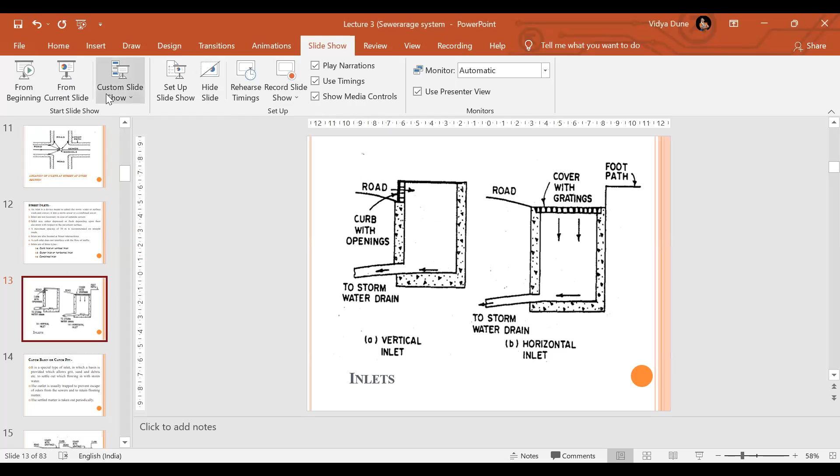So I will open this. If it is finished, then we'll go to the next. Once you finish, let me know. We'll move to the next point.

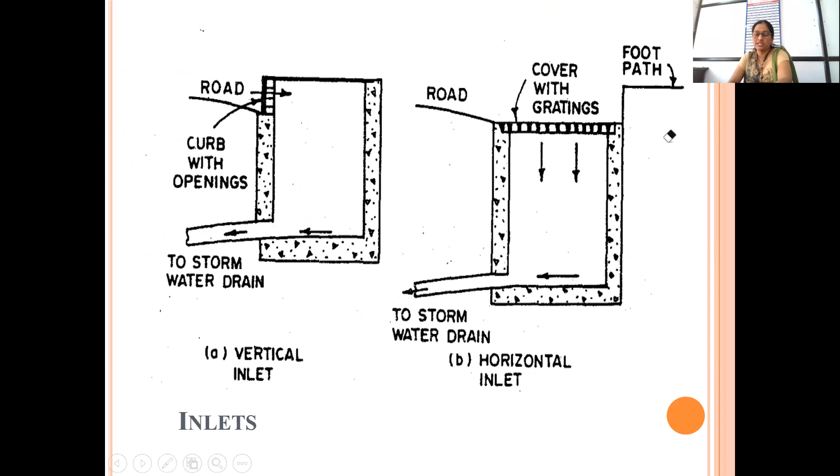So we need to restrict them. Here we have made an arrangement to avoid the entry of larger particles like plastic material by providing the gratings. But for the debris particles there is no arrangement; direct entry is possible in both cases. To avoid that issue, the same system is enhanced, and that enhancement is known as the catch basin. We will see with the figure what this arrangement is.

So here inlets are provided like this. Here is the road, and this is the vertical arrangement for the entry of storm water through the gratings. In the earlier case there was a direct disposal pipe here, but instead of that, here we have provided the hood, and because of this hood arrangement, the collected water is not moving outside this chamber directly.

It comes into this chamber, and naturally grit, sand, and debris particles are heavier, so they immediately settle down at the bottom, and hence the clean water will move through this pipeline. The outlet pipe arrangement is changed to avoid the entry of sand, grit or debris into the sewer line and to avoid the drawbacks of the sewerage system. This is the hood arrangement.

Another arrangement you can see here. Entry of water may be here or somewhere; you can have inlets through the vertical or horizontal inlet, no issue. But the outlet arrangement needs to be changed. In another figure, the water enters here, the particles settle here. Until the water rises up to this level, it will not move through this channel. Some more arrangement is done here: a bend is provided to the outlet pipe.

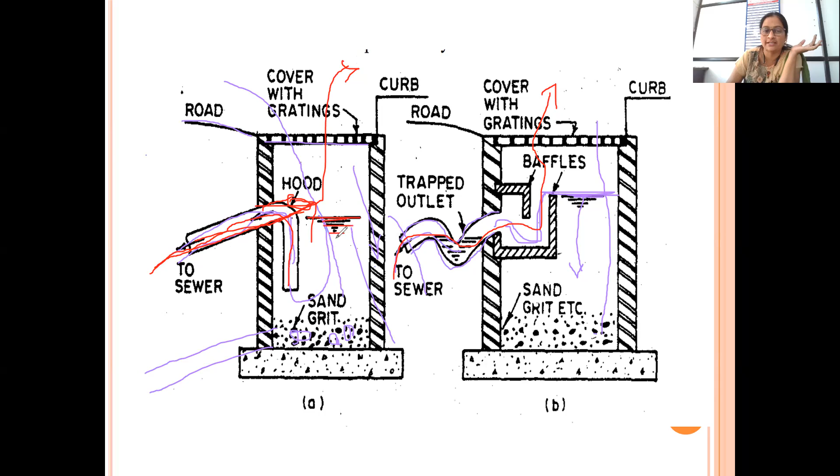But in both of these arrangements, it will not allow the water level to go down below that. So until here it is not possible for gas to enter. It is a water seal, so gas will not enter. It will be restricted. Here also is the arrangement of the bend, where the water will keep on being stored, and hence the gas will not pass through this water. So it will be an obstacle to the entry of foul smell from the sewerage system to the society.

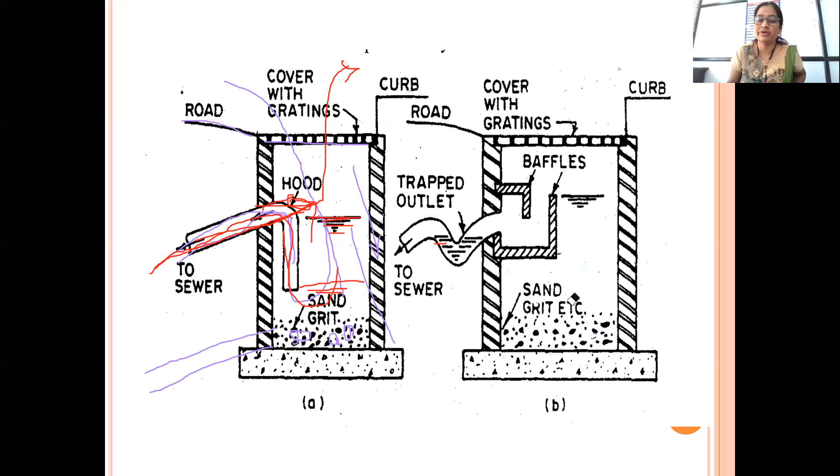So this way, two purposes can be solved. That problem will occur in the earlier type of provision, so that's why these kinds of modifications are done. Nowadays, instead of simple openings, these kinds of openings are provided, which can be renamed as a catch pit or catch basin, to avoid the entry of grit into the sewer line and to avoid the entry of foul smell from the sewer line to the society. So both functions will be performed well in these kinds of arrangements.

Is it fine? Understood? Ma'am, Rajanandini is asking: when sand particles settle up to the hood, there is blockage of the outlet. Yes, good question. Here I have read one sentence: the outlet is usually trapped to prevent escape of odors from sewers and to retain floating matter. The settled matter is taken out periodically. So intermittently, we need to go for maintenance of this catch pit.

These gratings are not fixed. They are movable. So you can remove the grit and the sand particles settled at the bottom manually and perform the cleaning of these catch pits, and that problem will get resolved. Very nice question. Actually, you are paying attention and understanding how this function is being performed. That's why this question was raised.

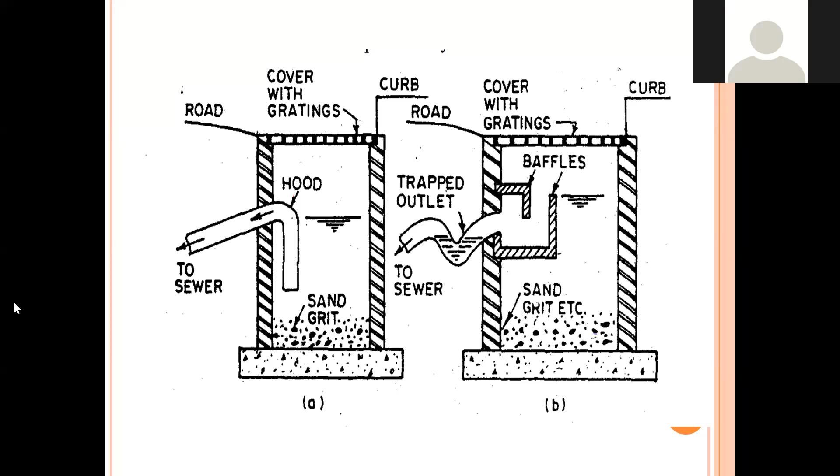Previous slide. This one. Yes, ma'am. Okay.

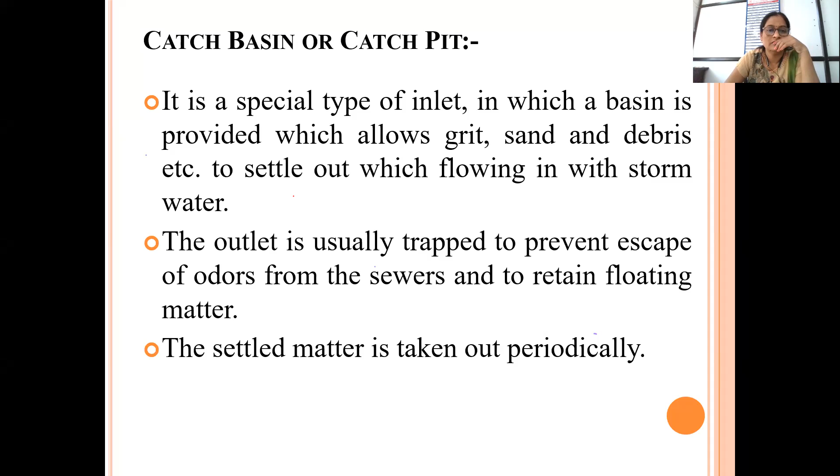Is this diagram finished by you? No, ma'am. Then finish it first. Or do you want to complete this write-up first? Okay, I will dictate later. Go for completion of the diagram first. The dictation part you will get later in the figure notes itself. But you should practice and understand while drawing; you will understand the function also. That's why I'm making you draw.

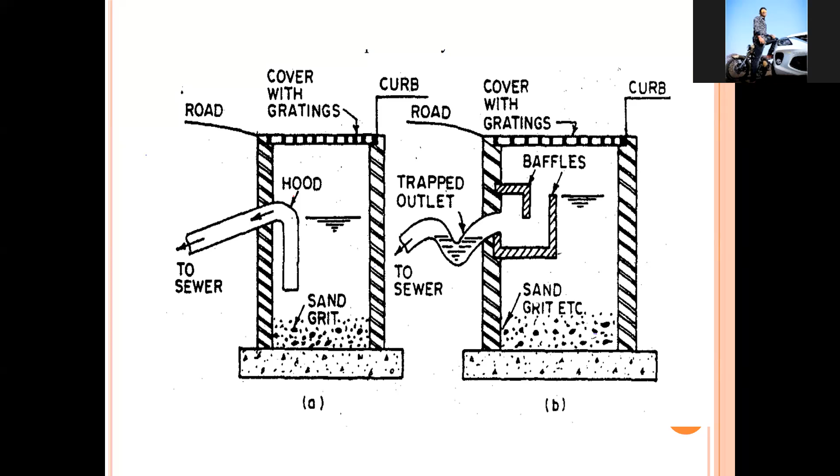Okay, I have received a message, completed, from Gitanjali. Still, I will give 30 seconds for all the remaining students. I hope many students have completed. Suraj is asking me to wait. Okay, Suraj. Rajanandini replied. We'll wait for Suraj and then go to the next point. It's around 11:15. Only one point to cover over the remaining 10 minutes. A little faster.

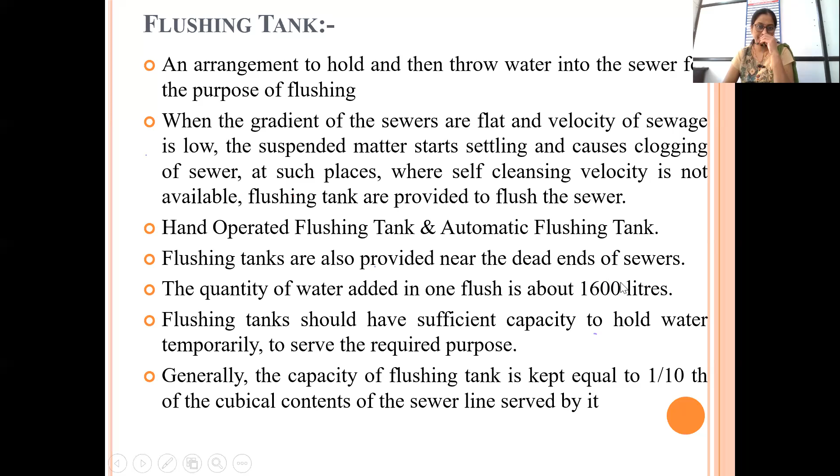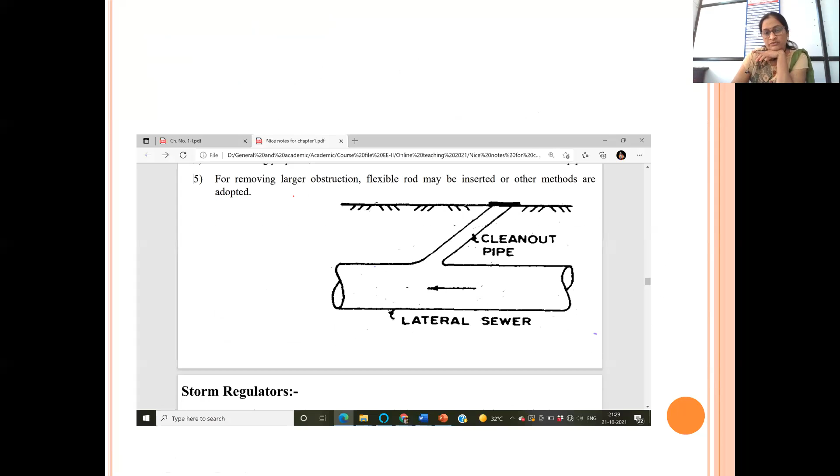Now the next one is the clean out. How a clean out looks, you can see here. Some portion of this figure remains, so we are stopping here and we'll see it in the next lecture from this point. Actually that part had to be finished today, but it took much time. No issue, we can plan accordingly.